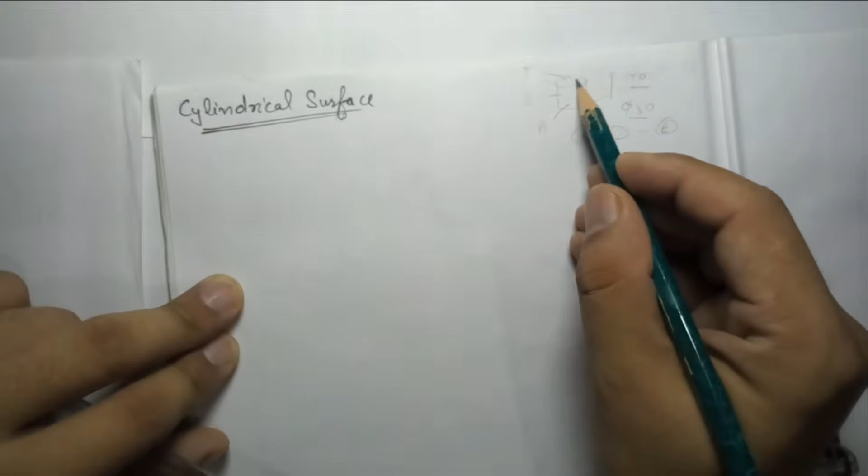If I break this cylinder, it is having three parts: base, surface, top. Now what is at the base? A circle, and we know that in place of circle we draw ellipse, and at the top again a circle is there. In place of circle we will draw the ellipse, and the straight part as the surface. Now it means to draw this we have to start with the base as ellipse, top ellipse, and we will join them. And how we draw the ellipse? Using 4 center method.

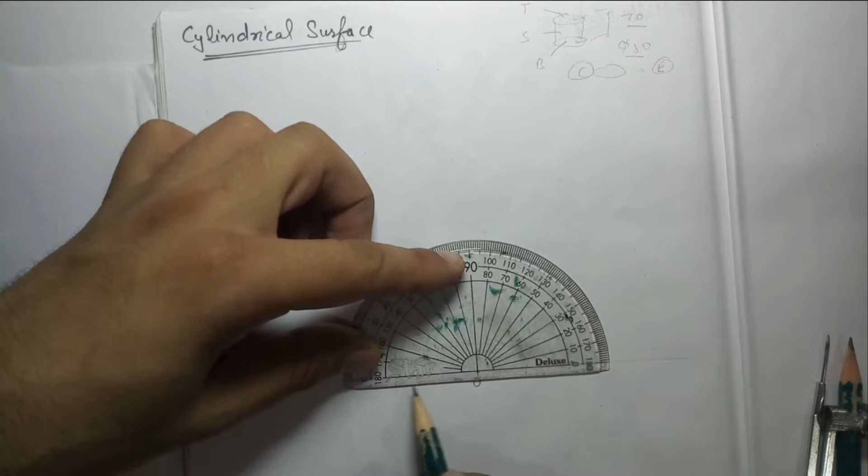So what we do to solve this question, first of all we have to draw the isometric axis. So everyone is knowing what is isometric axis. We draw a ground line, take any base point O. Now you have to take the protractor, put this point and axis 0 on isometric baseline, take 30 angle on this side, 30 angle on this side. Then we have to draw the lines. You have to draw very light isometric axis.

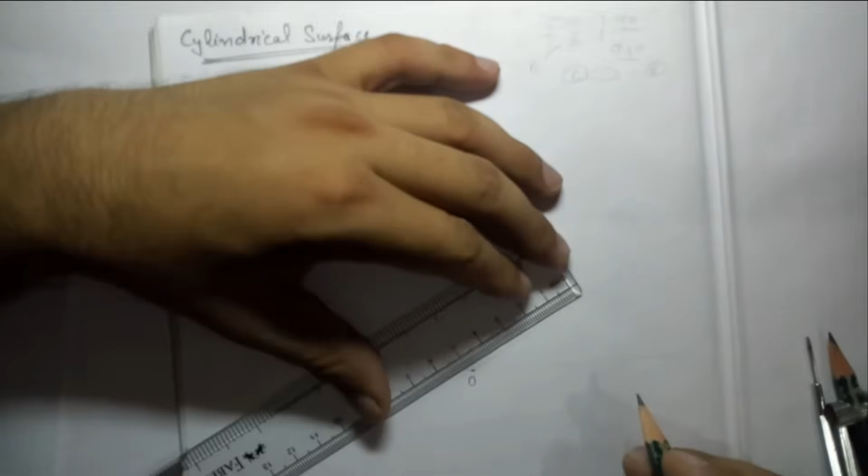Now we have a circle of 50 diameter. To enclose a circle of 50 diameter we need a square of 50 by 50. So at the base we will draw a square of 50 by 50. So on x-axis and y-axis you have taken 50 by 50. Now how we complete the square? Now we will use the compass to complete the square. Just take 50 from this side, mark, it will intersect on z axis because it is a square. So just mark a small point only, then you can join.

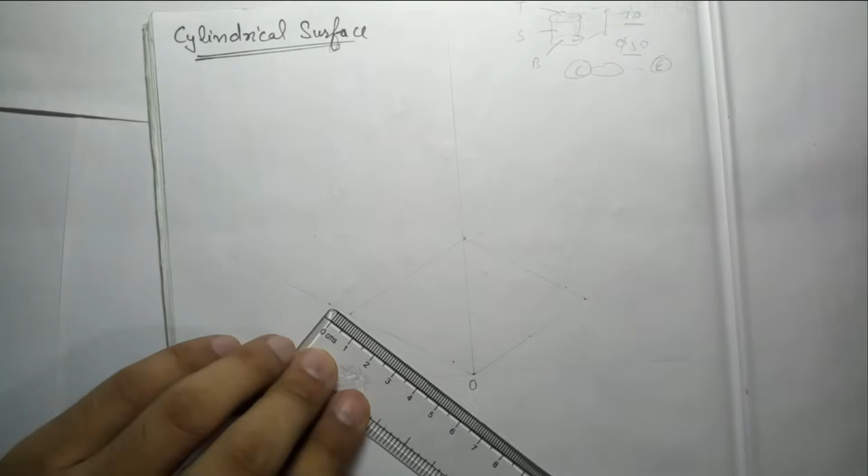All these are the construction lines, so you have to draw very light lines. Do not join them dark. This is not the main object, it is just telling you how to make the ellipse. So we are just following the 4 center method. What is the 4 center method? We take 4 sides and then we find out the midpoint of 4 sides. It is just similar to how I have told you to draw the ellipse. So we get the 4 points, midpoints of 4 sides.

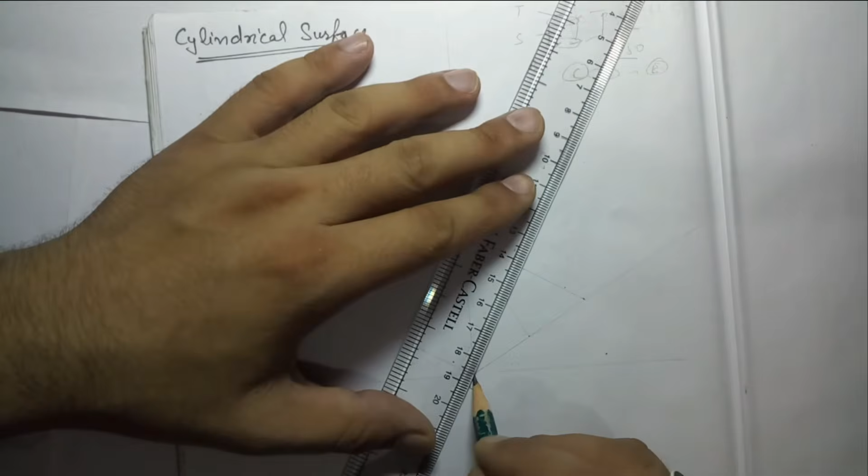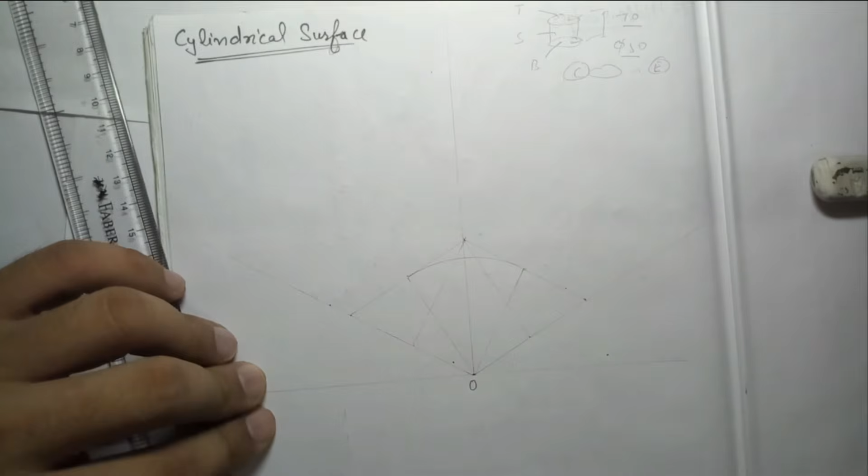After that what to do? You have to join this point with this one, just trying to make a letter A in the shape of A. You have to just join this. Now we will make the reverse A, or we can say the letter V. You have to just remember in this way, otherwise this is not the letter. Just to remember the steps of 4 center method. Right, now what to do? From this point open the compass up to this point or this point, both are same. Draw this arc, same from this point, open up to this or this, draw this arc, right, same.

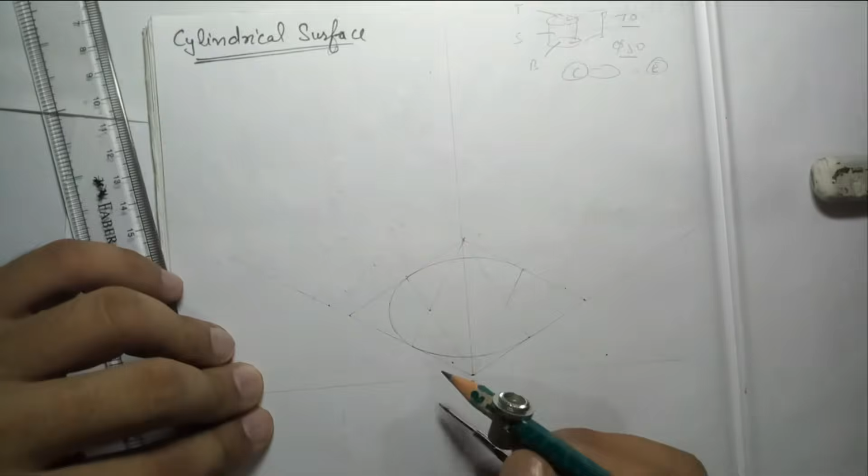Now put the compass here and open up to this small size, this one or this one, both are same. Now it might happen when you draw this arc, if there is any error, they are not joining. So with practice you have to take exact measurement and it will intersect if you are drawing without any error. But even then if any error is there, you have to just adjust the arcs so that they can join with each other. It should be a continuous arc.

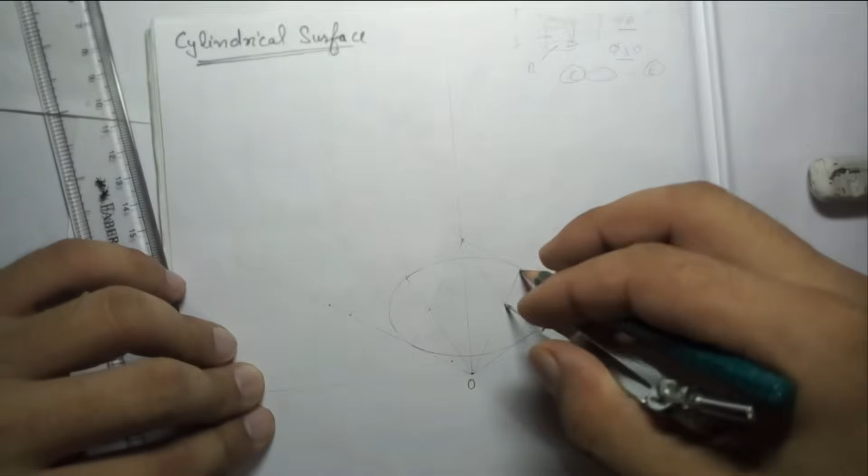Now we have to take the height of the cylinder. Height is given 70, so from all the 4 corners of square you will take the vertical height 70.

Again these are the construction lines, just make very light lines. If you are using the grid sheet then you have no need to worry about the vertical line, but on a plain sheet you have to take care that exactly vertical lines should be there. On the z axis just mark the point only, and from this rear z axis you have to take the point. So remember that 4 points should be there, 1 2 3 4: one from this point, second from this, third from this, and fourth from the rear corner.

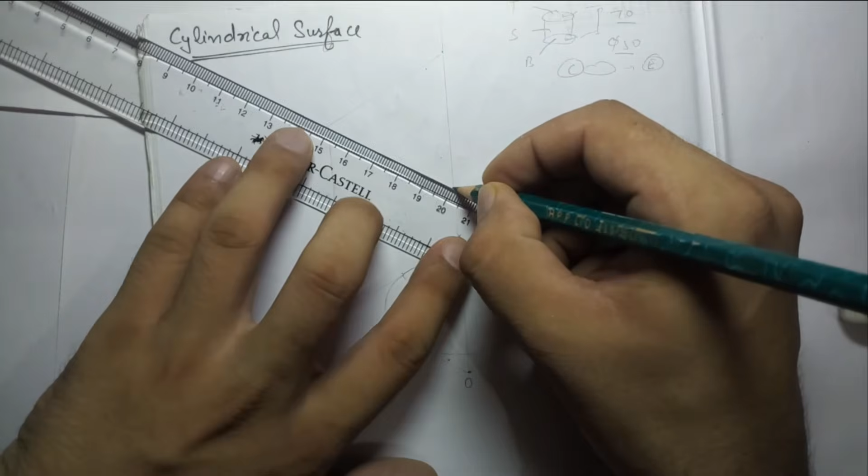Now you have to join them. Do not draw dark lines. These are the construction lines, they should not be visible from a distance. And in isometric questions, we are not allowed to erase any of the lines. So all lines are required. That is why initially make them light, so that we should not have to erase them.

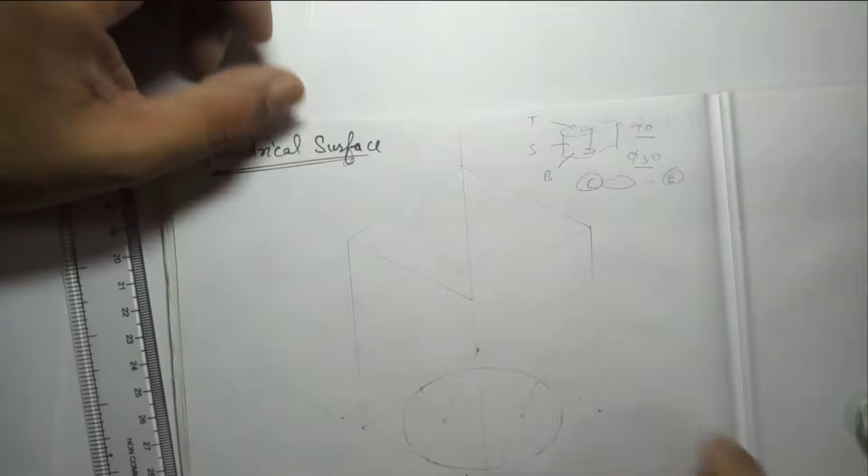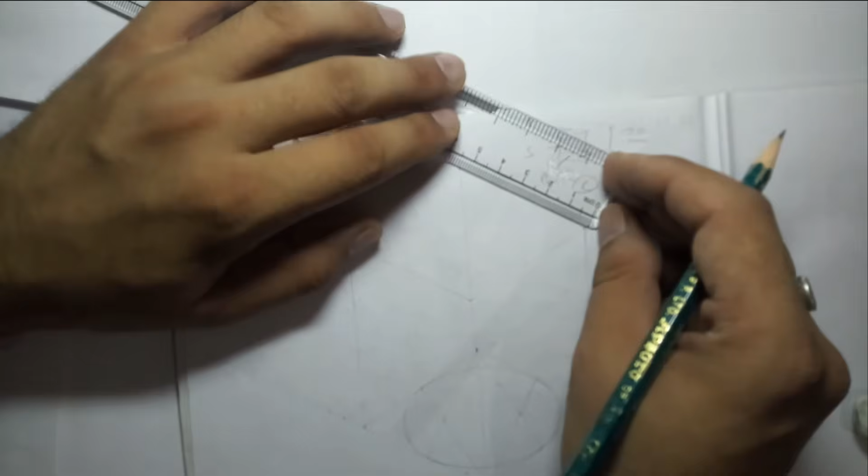At the top, we know that again the top of the cylinder will be the same circle. We will follow the same 4 center method. What to do in the 4 center method? Just find out the midpoint of the 4 sides. This is 50, so mark 25. So this is again 50, mark 25. Just mark only very light points, just to remember, or just a mark only to join them. Otherwise no need to mark them. Again like this.

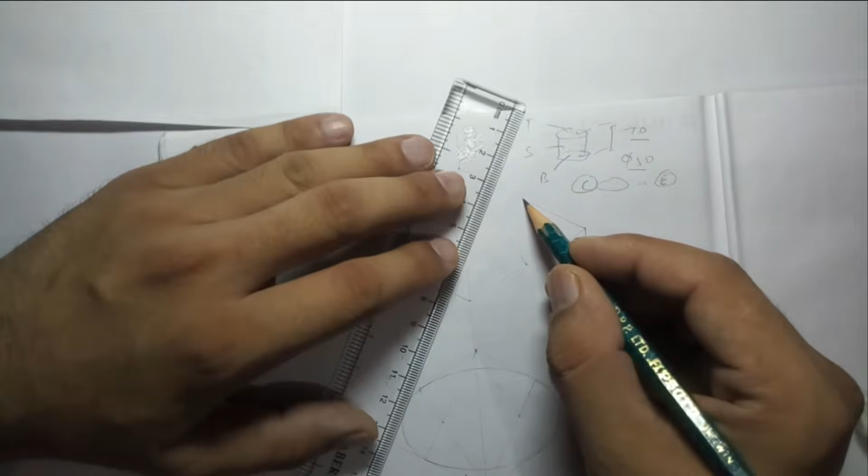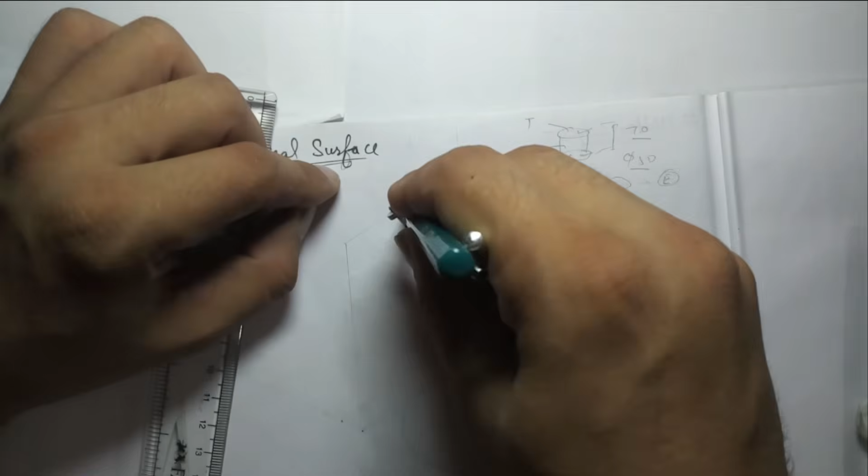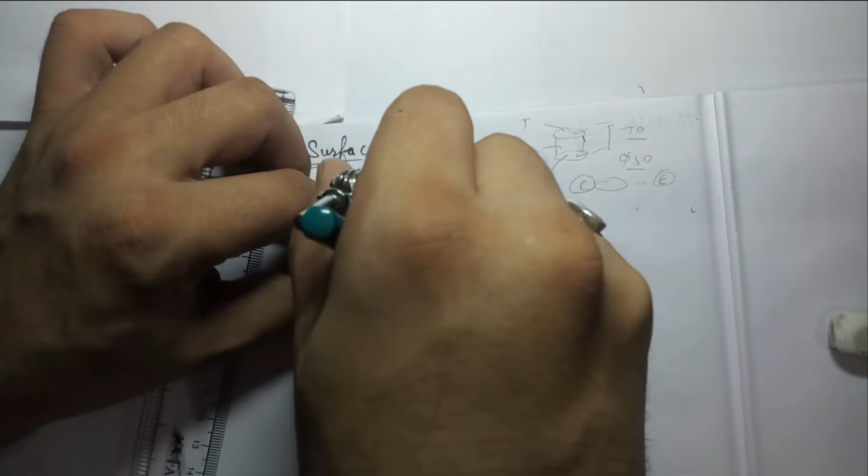Now you have to join. I have told you a method to remember, reverse A or V, we can say reverse of V and V letter. Just remember this thing. This is the top view of the cylinder, so you can make it dark. And always draw the single stroke line. Do not make the double stroke line, otherwise our cylinder will have double stroke lines and they will deduct the marks. So do check first, like I am checking.

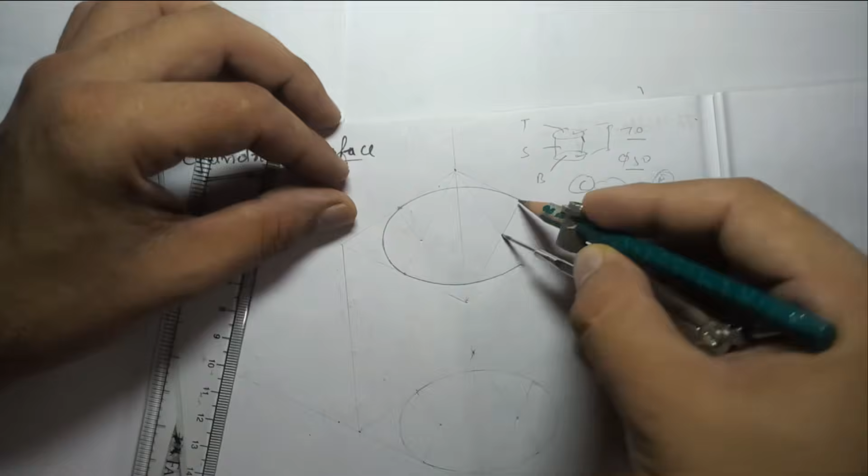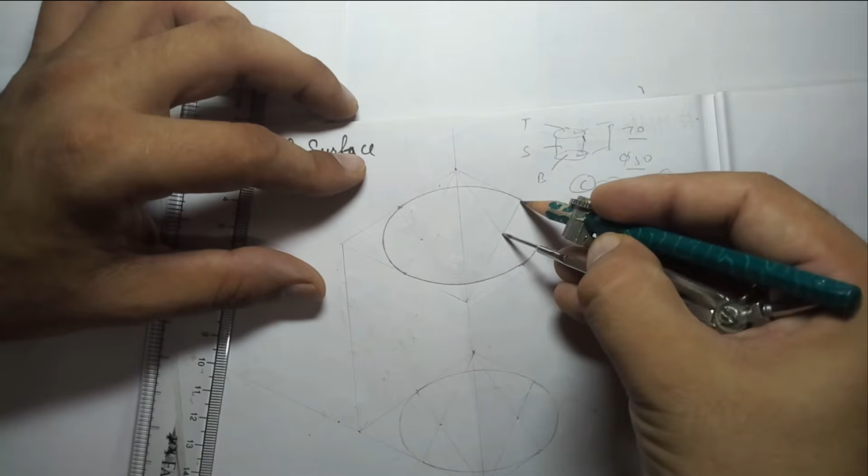Okay, I'm going to join this point. Now when I go to this side, my point is going to join this point. If any alteration is required, just alter these things. It might happen due to the error in the instruments, or maybe the drawing instruments, or while drawing we take the wrong values, like marking the midpoint. This is the diagram. And this is the diagram.

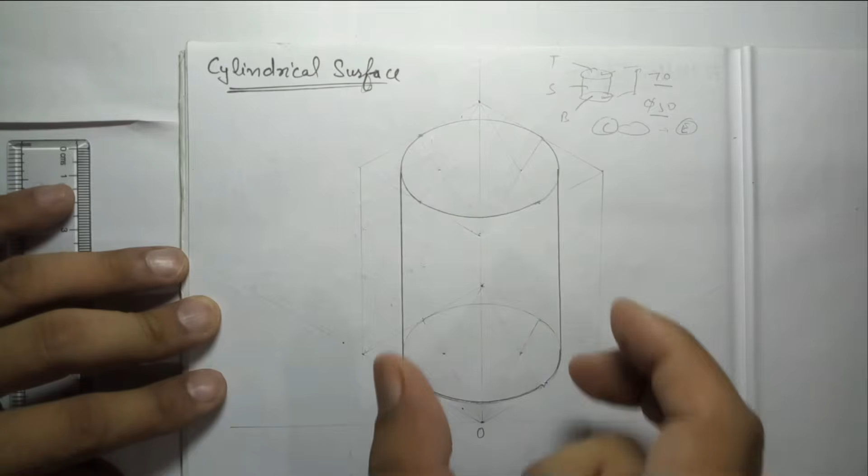Now I will make the visible part dark, so that it should be visible in camera, but in the exam you have no need to darken this. I will make this upper part and this one, which will be the outer edge of the cylinder, dark. So I am going to darken only to make the visible part visible in camera. So what will be the solution? Before that I will do the dimensioning.

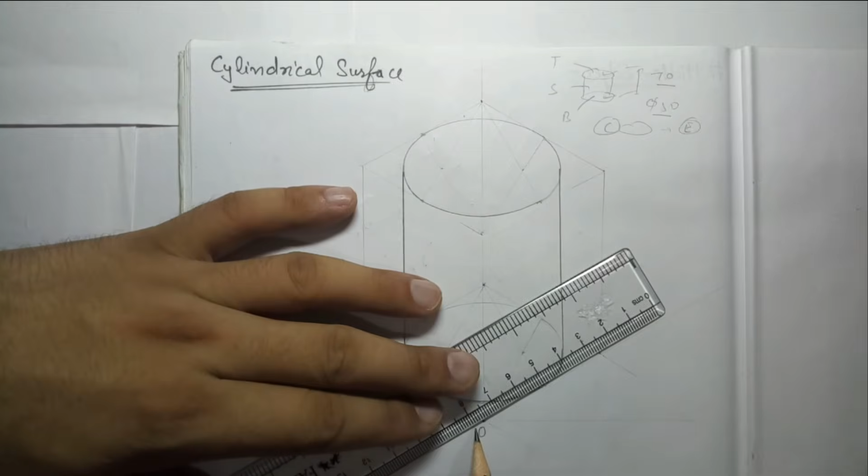How to do dimensioning? I have told you in isometric diagrams, the extension line must be parallel to any of the isometric axes. Means here I am taking the extension line parallel to this axis, then I will take the extension line parallel to this axis. Now here we have no need to give the dimension on both sides, because this is a cylinder, so we need to give the diameter only, no need to give the other side of the square. Now this is 50.

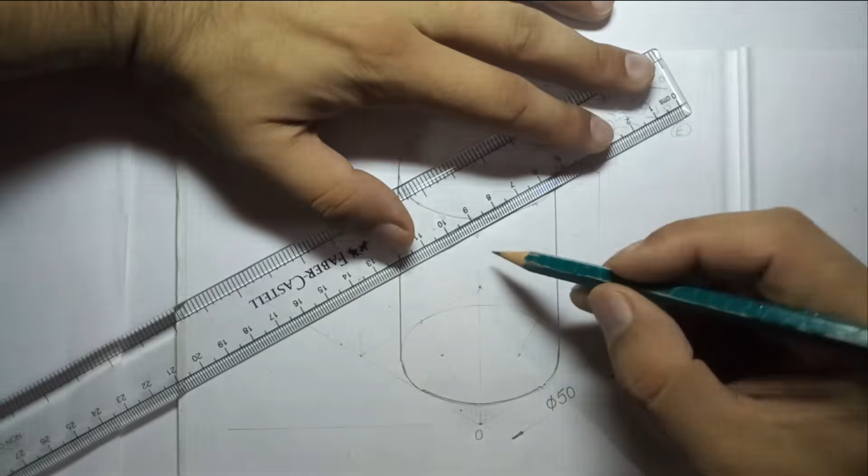After this we have to give the dimension to the height: extension line parallel to the object line, dimension line 10 mm gap from the object line, very light line, thin line. Height is 70.

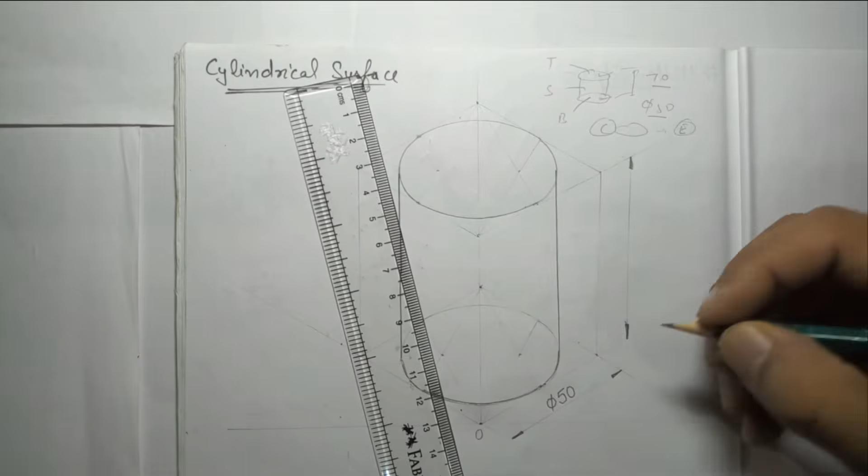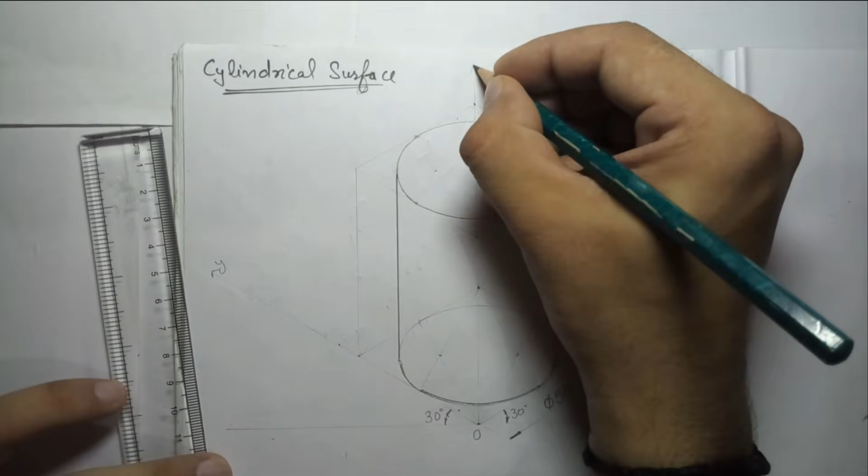Now you can give the value of these angles. Both are 30 degrees. You can give the value to this. This is OX, OY, and in vertical you can say this is OZ. This is the point O, and below this you can write isometric view.